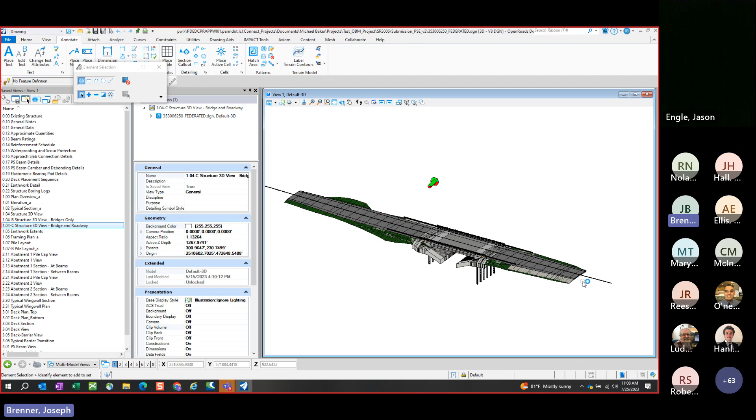So with that, we're going to jump right in. So here's the project. This is just an overview of the model and the roadway, that adjacent roadway. This is essentially the entire project encapsulated here, with adjacent roadway and the bridge model. You can see we have an integral abutment replacement.

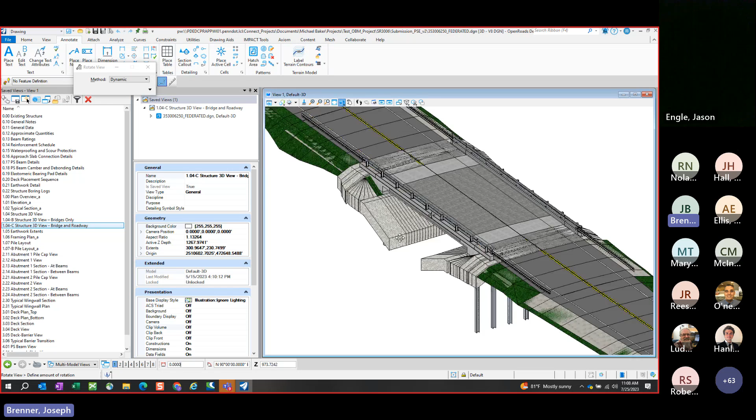You can see some of the riprap shown here, and some of the grading included, as well as the adjacent roadway grading as we come back here. So this gives you an idea, gives you oriented a little bit about what this project is.

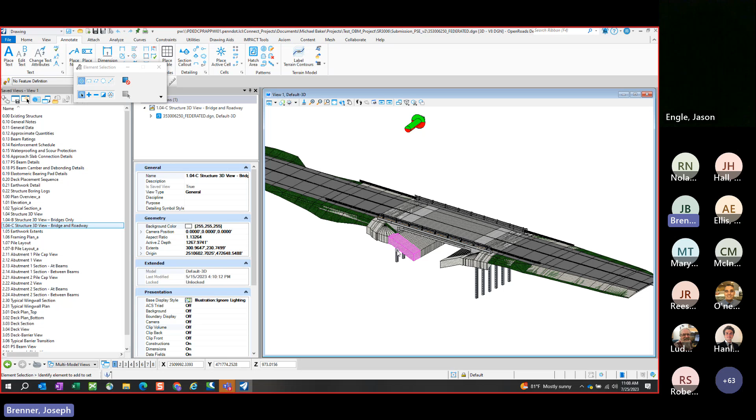The first thing I want to mention here is this is what we call a federated model, or a container file. So this is essentially all the different discipline files referenced into one file that can be viewed together. If I open up here, just where we're at in the project, you can see all these different files.

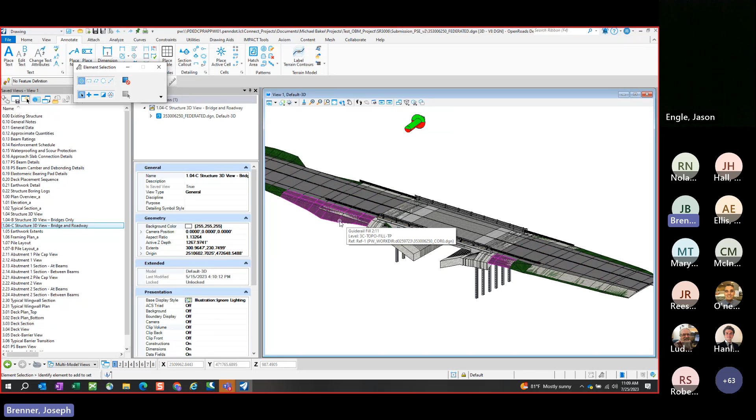These are the different files. We have different bridge element files here for beams, decks, barriers, abutments. So all those are individual files that were developed in OpenBridge Modeler software, and then we are referencing them into this container file along with the roadway and associated information. I'll show you why we do that, and go through a couple different reasons.

The first reason we do that is you can see here that we have what Bentley calls saved views, listed on the side. This is just one of the options that have always been within MicroStation. But what we can do here, with all the reference together, is set up specific levels, display styles, certain information that we want to see in particular views.

We can set up a particular view that can be easily navigated to by the users. In this case we're looking at the 1.04-C structure 3D view, bridge and roadway. If we want to look at the bridges only, not included with the roadway information, we can go ahead and navigate just to the bridges-only information here.

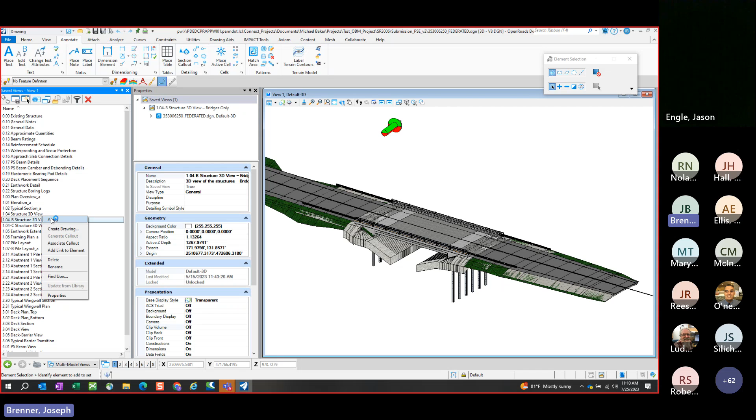ProjectWise is acting real slow on me today. But now here we're looking again at the same bridge, just with the roadway information turned off. Essentially the reference is turned off, and here you can see we have a different display style, more of a transparent view—you can kind of see through the beams there and everything.

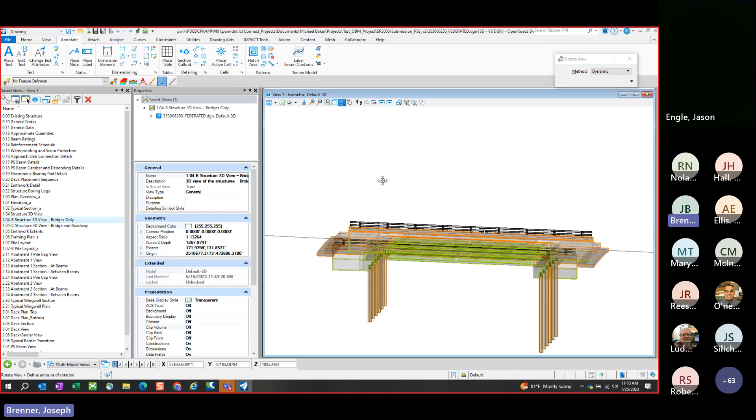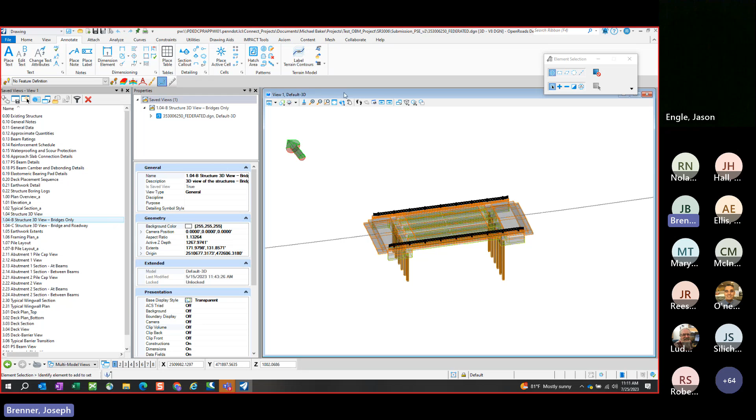So there's a couple reasons why we really like this attribute, especially for bridge kind of projects. With this, we can set up not only an overview—obviously we have 3D views here and can always spin and use this information—but we can also set up particular views for elements.

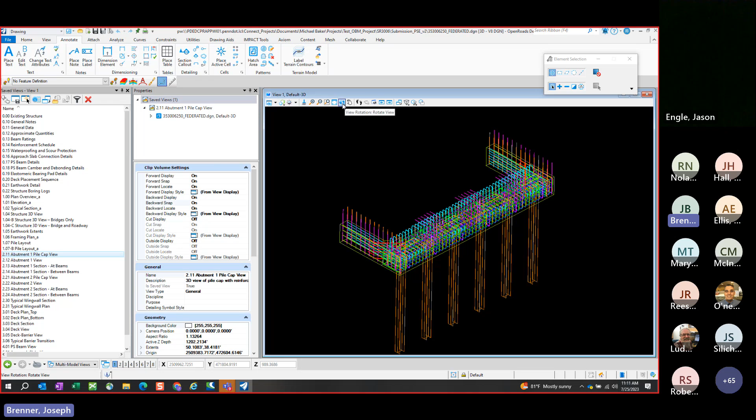I think this is extremely helpful, especially for those just getting into this workflow, to have some of that in a place where you can find information, with a title and description. If I bring this out here, we have a description of those views so that people can get oriented and have those views to look back to find the information they need.

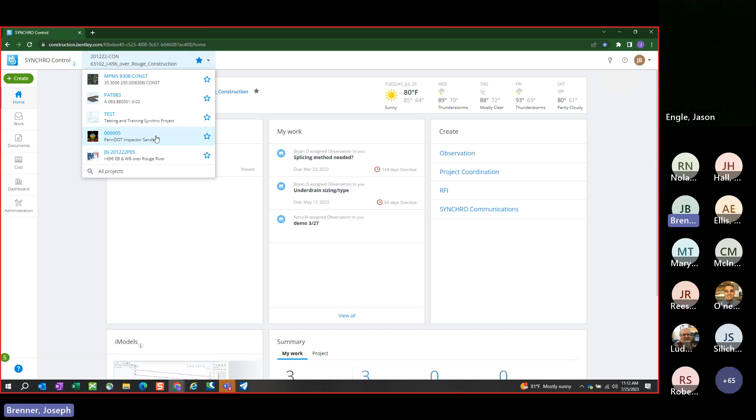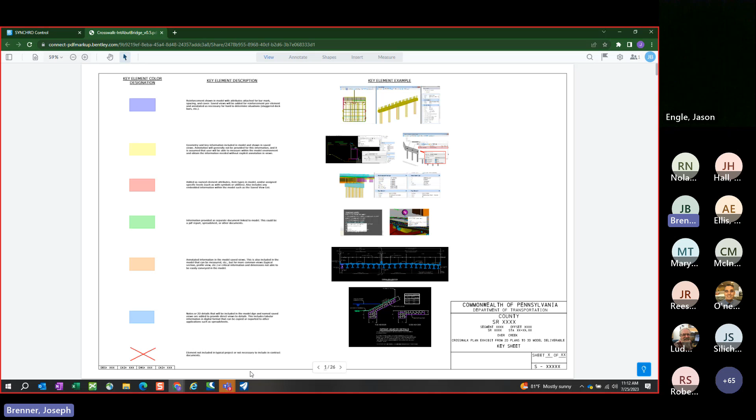This is going through a similar set of plans. I think we went over this with this group before, but it literally goes through a plan set, color codes it, and tells you where you can find that information in a digital deliverable.

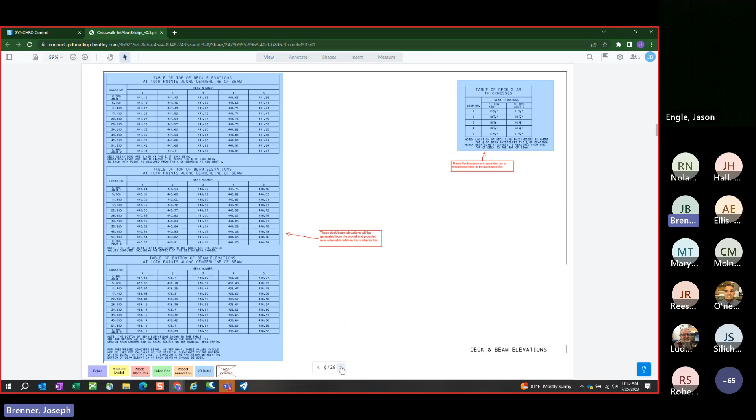We can go through—obviously we have several views here—and what we're trying to get at is we're not just handing a 3D model to a contractor and saying figure it out, go through the level list, figure out everything. We're giving them a starting point, and the idea is they use these saved views to get to the information they need as a starting point and add and measure whatever they need from there. We also have particular views that we have annotated.

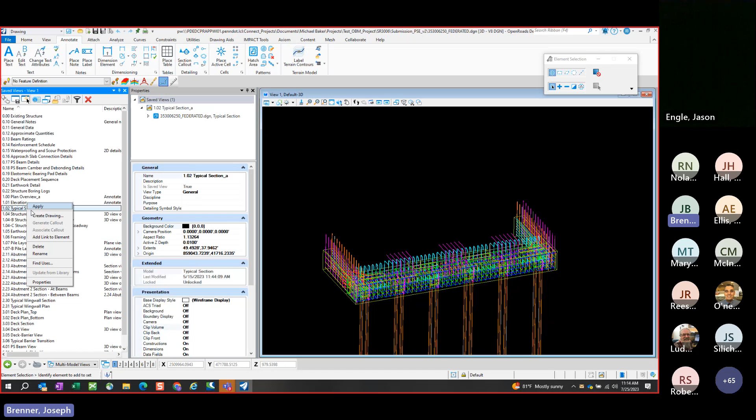Okay, so these are generated from the model here, but we have gone through and put on some typical annotations. So there's certain views that, and I'm a bridge engineer, that just going through it is kind of staple. You want to be able to find that information quickly. You don't want to have to measure a model every time to find that information.

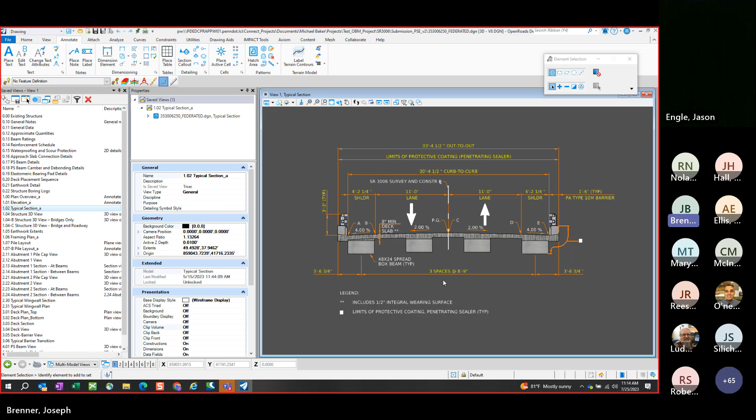One of those is the typical section. We have this information - beam spacing, everything looking exactly like you would typically see on a typical section view in a traditional plan set. But you have to remember, this is generated from the model, so this is basically a snapshot of where we are in the model, a section through our model. For example, this is through the end block of our beams, so you're not seeing the void in the pre-stress box beams of this set. If we were going to do this again, probably we would have taken the section at a slightly different place.

That's some of the things you have to remember here as you're going through it, and kind of looking at it, that you are in these particular views we are generating from the model, so they are snapshots of the model. That's a good example there.

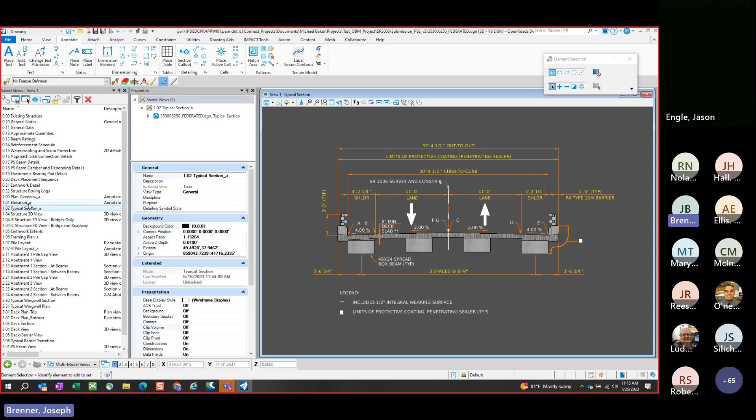So we have a few other ones such as elevations, plan overview, those types of views here that all have their typical annotations on there with those key information.

The other thing, there's just certain information that's easier conveyed with 2D details. For example, a big one is just general notes - that's just a 2D thing. It's just easier to have that information just in note form. We're not eliminating all of that here with a 3D model.

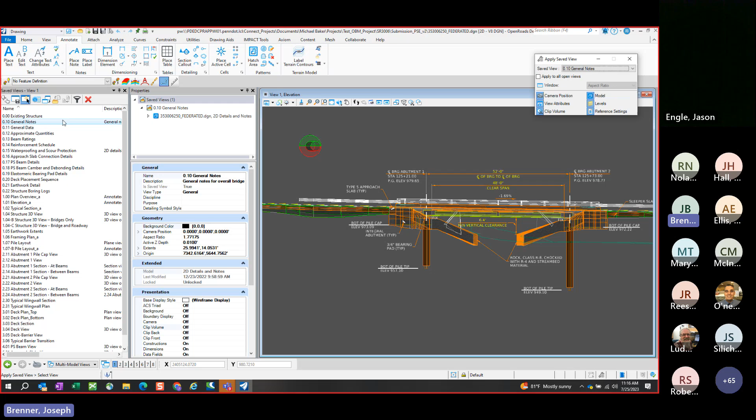So we have a particular save view here to our save notes, our general notes section. Now you'll notice here this looks very similar to our 2D details that would be in a PDF, but we have generated this now in the DGN file, and now these general notes and everything else can be referenced into the DGN file in a digital format, and all can be accessed through this federated model or container file.

So we can save views directly there. We can basically have a one-stop shop for all our information. That's another reason why we like this federated model and kind of pulling everything together here and going with these save views. So we have general notes.

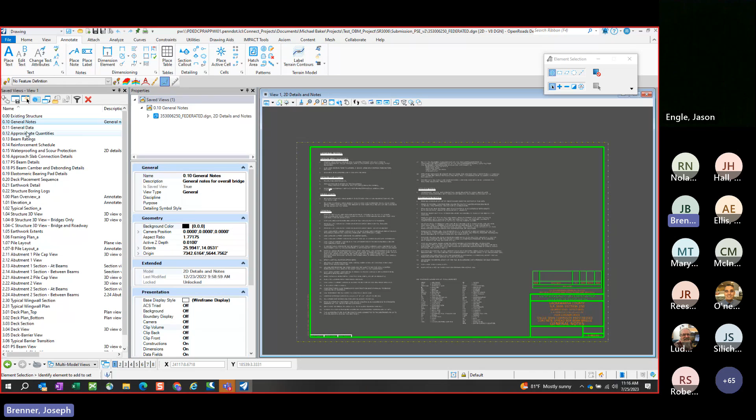Additionally, we have all of our typical information - we have approximate quantities here. As you can see, this is actually a linked Excel sheet that somebody can take this information directly from, but it's a linked spreadsheet that is also included in the deliverable files. So if anybody wants to just go and use the Excel and the information out of it for quantities, deck elevations, those types of things, they can take that file and have all the information here.

This is essentially a view or a replication of that data here within this information, so that we can kind of save to it and get to it easily.

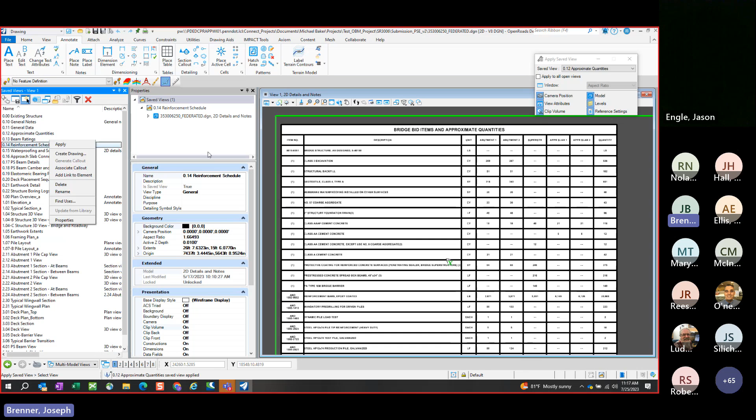So you can see there's the ratings, reinforcement schedule, those types of things are all tabular information that's available here in the same chart form, but also the information behind it, the Excel spreadsheet, is also available in the deliverable information for a digital file.

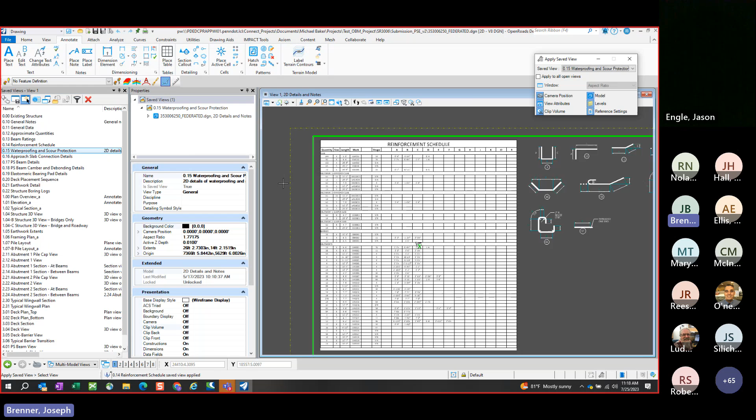Couple other things I'll go through here. As we mentioned, there is some 2D or some information that's just easier to convey in 2D details, or it's just more efficient to do so at this point. So a good example of that is some of the waterproofing details. Trying to do this in a 3D model and have somebody understand all of this information and be able to pull it out of a 3D model would be difficult.

For example, the preformed cellular polystyrene - they're going to pick that out of the model here, 2 inches thick, or even some of the membranes and waterproofing membranes and everything - that just is more easily, more efficiently and effectively conveyed with just a 2D standard detail. So we have these standard details for certain information that again is available.

We can still, because it's part of the DGN file, part of this digital file deliverable, have particular saved views so they can navigate to the information very quickly and have it in their hands available quickly. This differentiates between the generated views from the 3D model versus these 2D standard details put in for supplemental information.

So we have several of those here. You can kind of see those lined up here.

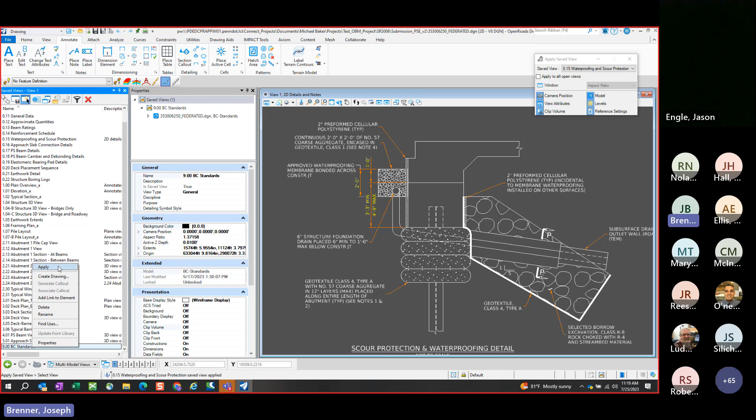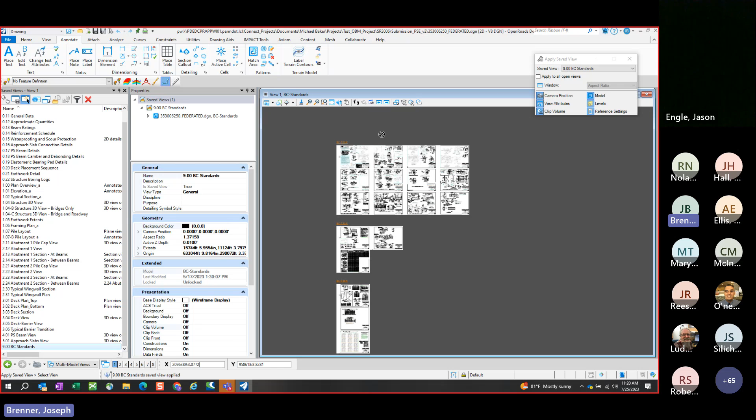Now that we have this information all digitally, we can also put in things like BC standards, just copy that information in here. In this case we use raster images of the BC standards. This came from feedback from the inspectors, who asked if we could pull in the BC standards so they don't have to have that as a separate thing now that we're all in the model format, since we'll be looking at this information. We said yes, we can definitely do that.

So this is just the applicable BC standards, raster images brought in here, and now we can pull that into a separate file and reference it, with saved views directly to that information so they can pick out what they need.

Okay, hopefully that gives you an overview of the information here.

What we're going to do now is leave our ORD and DGN files behind and go into the Synchro environment. This is another way to view the files in a different software called Bentley Synchro, which is cloud-based. We'll show some of the similarities and also some of the differences and limitations here for the different views.

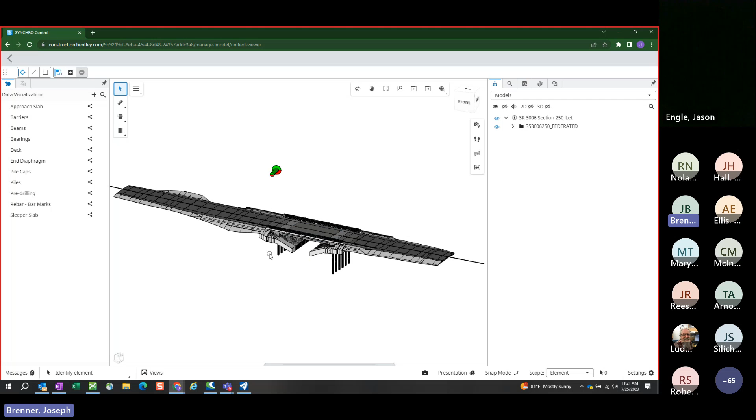So this is the information here within our Synchro model. Again you see very similar, this is a similar view to what we started out in, right? Overview, you can see the adjacent roadway information. We have our bridge here and some of the different surfaces around here.

So we have that ability to bring that information into Synchro. We also have the ability to do saved views, similar to what we did in the DGN files. It's one of the things we're working out with Bentley right now, making sure that information comes through 100%. We've had to recreate some of those saved views or update them—you can see that in some of the group titles here—but we were able to get that information into similar form, similar saved views to what we went through before.

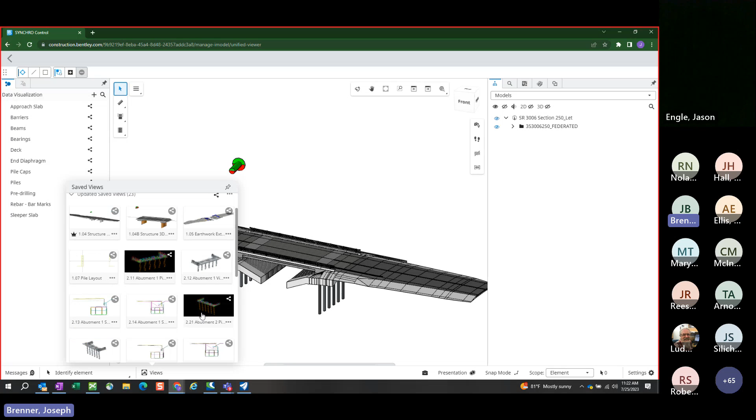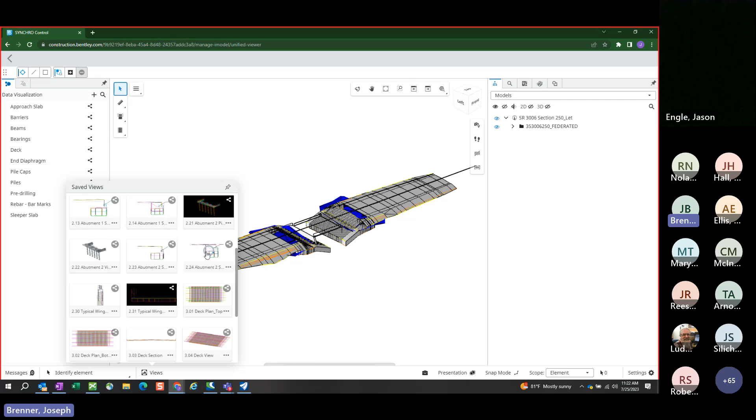So I'll go through a couple of those here. Again, here's just a structured 3D view, with some of the earthwork coming in. So again these were all coming through here. We could still do sections—some things to note: you can see that this isn't in some ways quite as clean as what you see in the DGN files.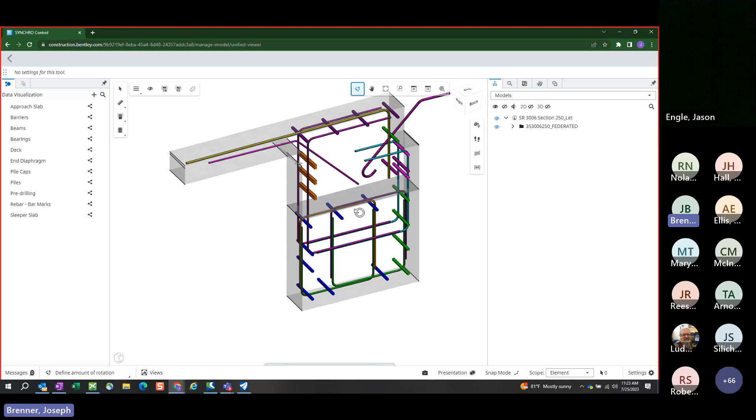And again, you just have to understand that these are snapshots in the model. If I rotate this, you can see that this has a section depth, that we're trying to show certain information, rebar here through the section. In this case it looks like it's through a beam without a pile, so typical if you're used to the integral abutment sections that we typically do here, you can see that information shown.

One other thing I wanted to point out, that I failed to do in the DGN file, is that all of the elements in these models are smart, if you will—they have logic and information behind them. So I pulled up here just on a certain rebar set.

All the rebar in this model have certain attributes attached to it, so that anytime you select a file or piece of information, we can view this as properties of that element. Here we have bar mark, so we can automatically find that information. We also have size, grade, and the bar spacing included here.

This is so that when the contractor or inspector clicks on a bar, they can quickly get the bar spacing. It'll automatically select that set, and we have the maximum bar spacing for that set, so they don't have to measure between each bar. That information includes the side, bottom, and top cover of those particular bars.

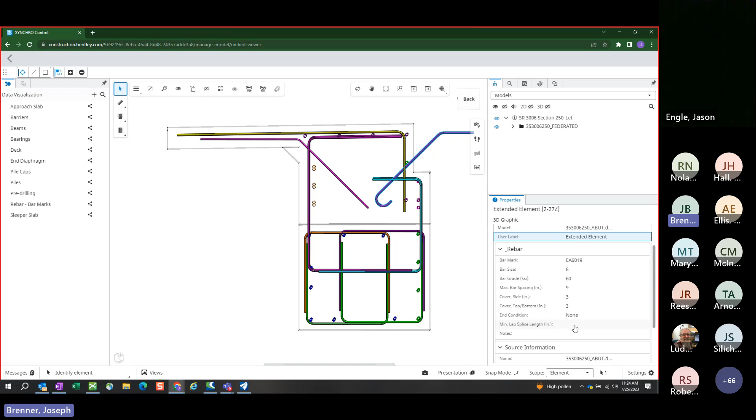There could be some end conditions like hooks or mechanical splices, those types of things. And if we do have bars that are spliced, we have a minimum lap splice length put in, and of course a notes section that we can use for any additional information for that particular set of bars.

We also have them for solid elements, other bridge elements here. In this particular case, this is our pile cap. We have our NBIS number, getting our asset information set up here, concrete class, fixity, location. Sometimes it's easy to get turned around, so you have to click on that and make sure you've got the correct element.

We also have some information here that we can put in as details. This is just listing, at the bottom of the pile cap, a certain elevation. That was something that came out of the review, that the reviewers wanted to see as part of that information, and not have to calculate or dimension that themselves.

Finishing this off, we have anything that could be some BC standards applicable to the element. Not only do we have them referenced, but you can click on that element and find the information you need for the BC standards.

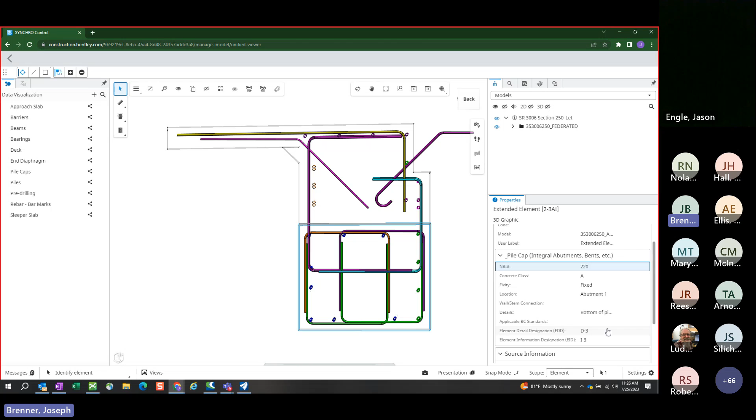The last set of information for each of the solid elements is the level of development key that PennDOT is using, one of their standards being element detail designation and element information designation. We won't get into that too much here, but for each element, in this case the submission for letting, we have that as an attribute somebody can quickly gain and glean from the models for the specific properties.

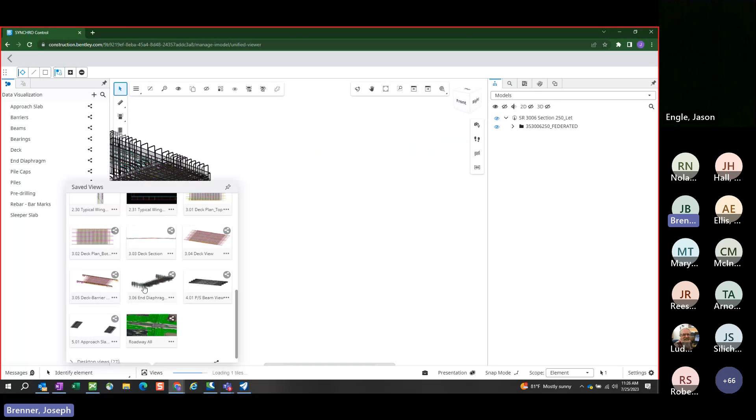So just working through those saved views and diaphragm details, again you see reinforcement. Sometimes it's amazing that we can get concrete in some of these things, how much reinforcement we put in here, but we're able to find that and have that information in a specific setup.

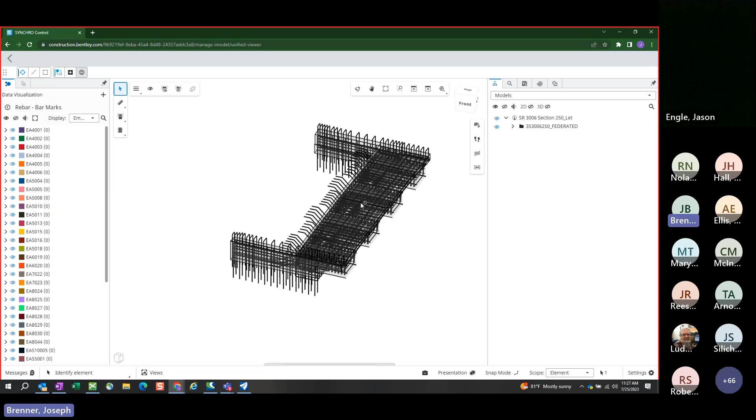The other thing we can do, particular to the Synchro control, is what they call data visualization. In this case, we have some of the different elements set up here that we can reference and filter out to find particular rebar sets.

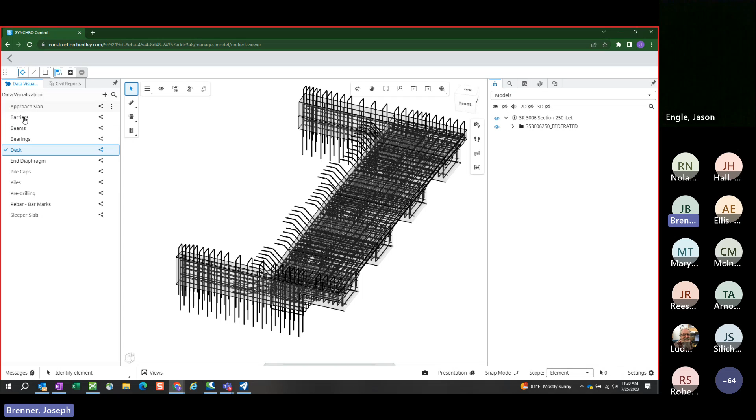Let's see if we can pull this in and show you what that looks like. Let me go to a different one—that one looks like it's off for a second. Looks like what happened before with it breaking seems to happen again here. So we'll go through and actually create the data visualization so you get to see that too.

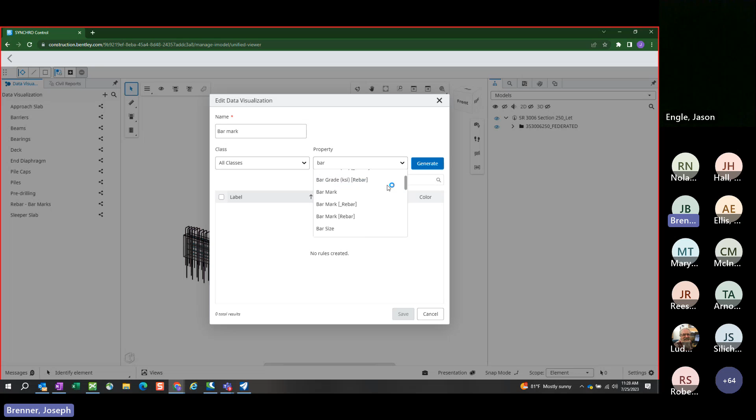So let's do a diaphragm here. We're going to create a new bar mark designation for all of our bars. Let's look here—looks like we have bar mark and rebar. We can generate that, and save that. Now it looks like we're in business here.

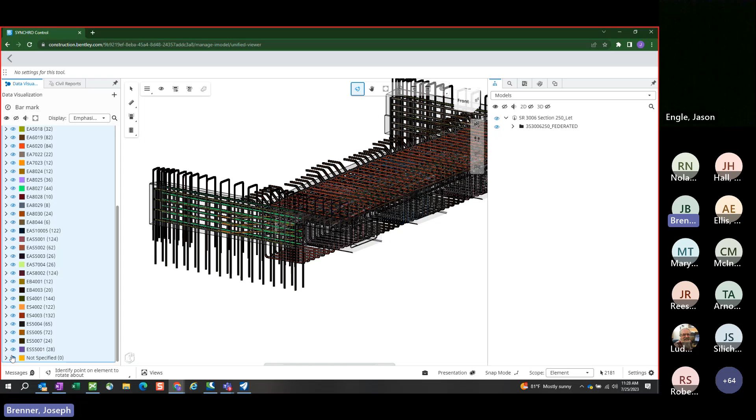So if I zoom in, you can see it gives the rebar a bit more of an attribute here, different colors, and now we can isolate certain bar marks. So if I say I want to really look at that—

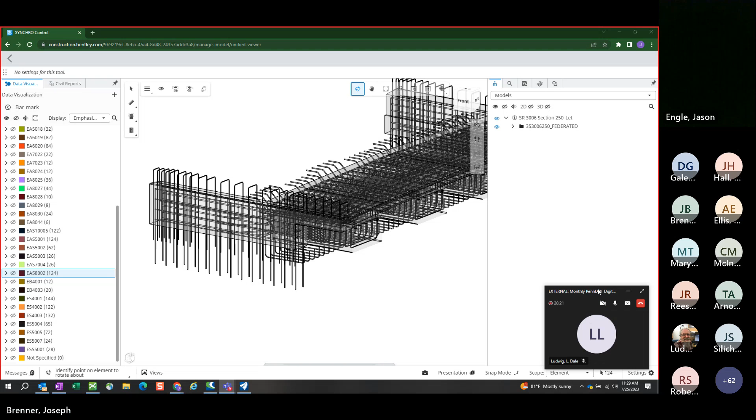You guys hear me now? I hear you well now. Thank you, Dale. I've been having trouble with this headset, so I appreciate that. We should be good now, but let me know if it happens again.

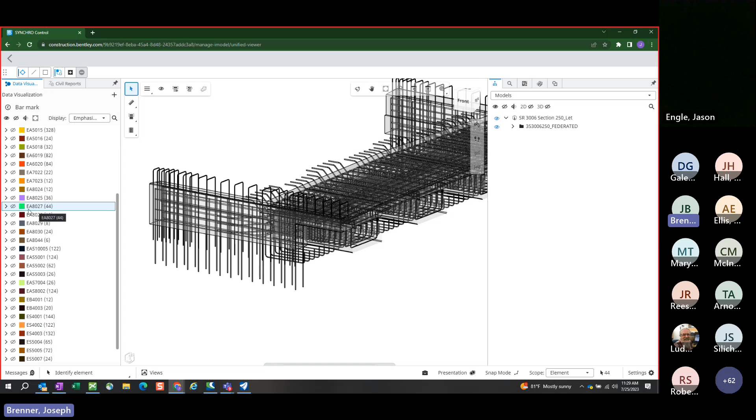So again, now we have our data visualization. All of our bar marks, all of our rebar, are essentially set up here. If we want to see our EA 8027 bars, we can either select them and have them highlighted so we can quickly find that within our model, which is called emphasize. We could also isolate them, where everything else turns off and we just see those bars.

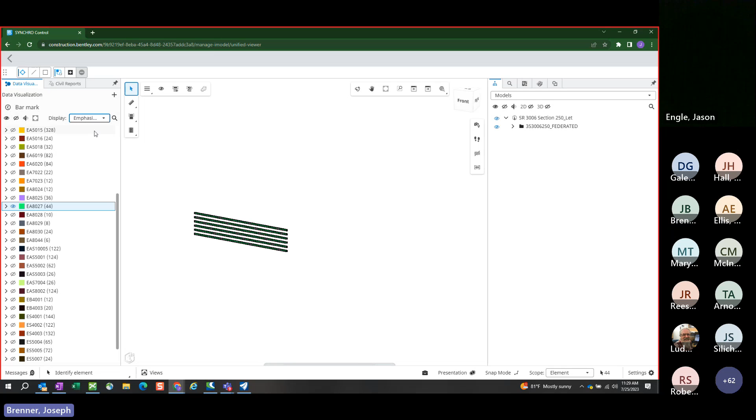So just some different features here with this cloud-based software that we've been working with, seeing how we can best convey this information in these particular views in these software tools.

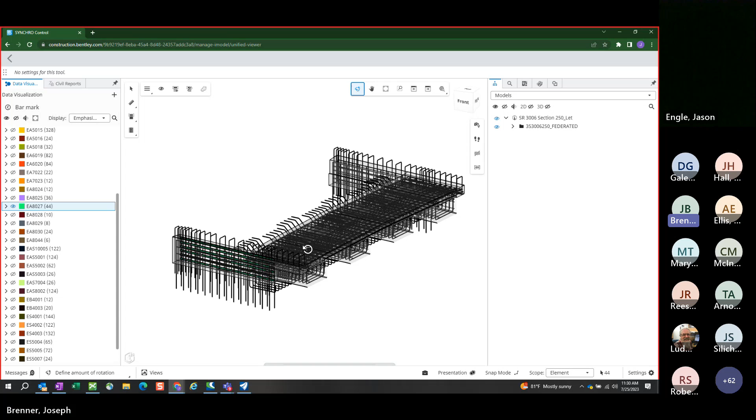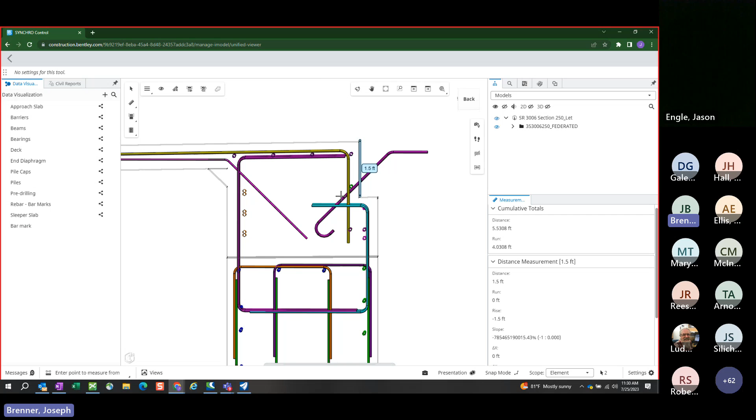Let me go back here to our section view. And this is all again completely to scale, so anything can be dimensioned through this. You can find particular start and end coordinates, so XYZ information for everything we have here. Beam notch dimensions, everything again is to scale, and information can be pulled through that.

We could take specific sections through here and again get different properties. So that's really what I wanted to go through here today, just to give an overview of what that looks like in an actual project.

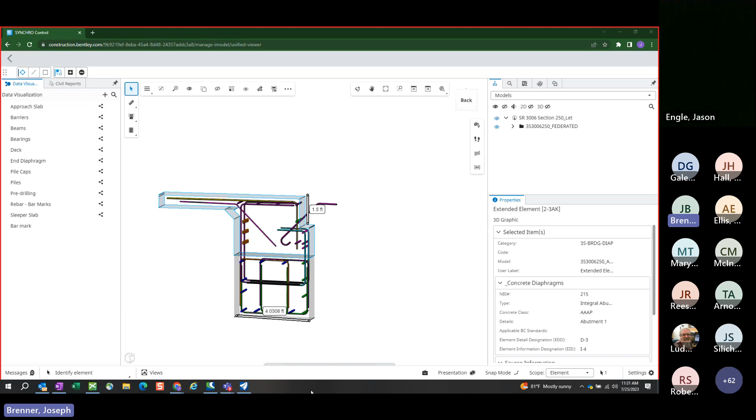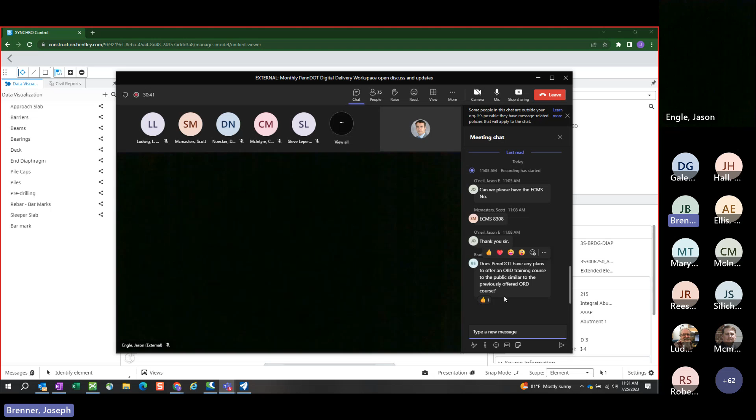Scott, I know you're still on the road here, do we have time for questions? Yeah, you still have about a half hour, Joe. Okay, so this is all me, huh? Okay. I'll stop here for now before we maybe take a look at some other things. But does anybody have any questions? Looks like we got one in the chat here.

Does PennDOT have any plans to offer an OBD training course to the public, similar to the previously offered ORD course? Scott, I can start with what I know, and then if you have anything else to add. I do know that is in the works, Brad. There's been a course developed, and it's been going through internally at PennDOT with the pilot projects. So I do know that is in the plans to offer that to consultants as well.

Any other questions from the group? Looks like, is it Jason has his hand up? Go ahead and unmute yourself if you can and go ahead and ask.

I just, I guess my question would be, and I've asked this in the past, but it seems like you were kind of integral in developing this particular project. As far as development of this model, how does that differ as far as effort and time compared to a traditional project delivery, plans delivery and whatnot? Just so as we start to migrate into this, we can start to prepare as far as design schedules goes. Obviously there's a learning curve and it will increase over time, but just to start out, what kind of effort and time are we looking at to deliver compared to a traditional process?

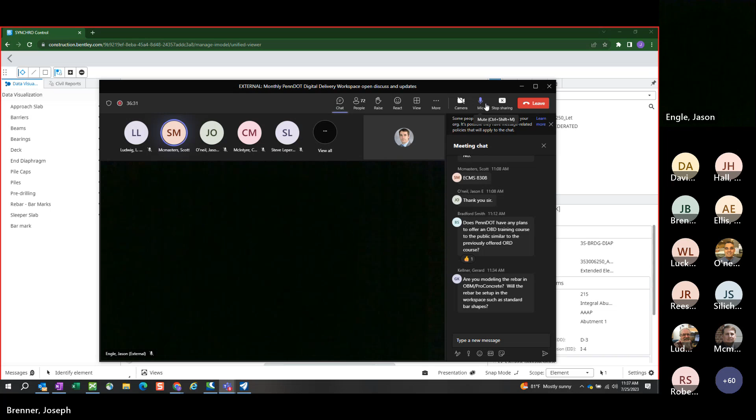For the District 1 project, that's something to think about - there's going to be new things, surface templates, linear templates. There'll be some stuff that the roadway side's going to have to learn as part of moving this forward. No, good point, Scott. Thank you.

Another question that came in here I see is, are we modeling the rebar in OBM and Pro Concrete, and will the rebar be set up in the workspace such as standard bar shapes? So another really good question here. The first answer is yes, we are modeling them using the Pro Concrete tools.

In this particular case, we were using all the tools now available through OpenBridge Modeler. Bentley's kind of migrated the Pro Structures or Pro Concrete tools into OBM in certain cases, and there is now a way to activate the full tool set - if you have a Pro Structures license, you can activate the full tool sets from Pro Structures to do your scheduling and everything there. So yes, that's how this particular project and the other pilots are handled.

We do have the standard shapes in the ProStructures library that is currently part of at least the test and the workspace that the pilot projects are using now. That has worked well for most of the shapes. We found some of the more complex shapes to be an issue.

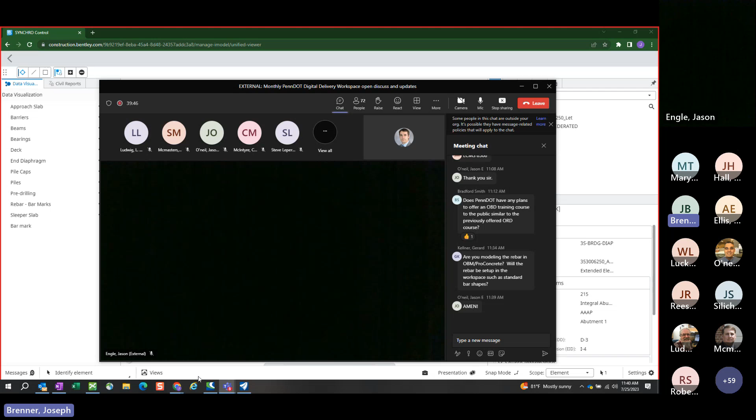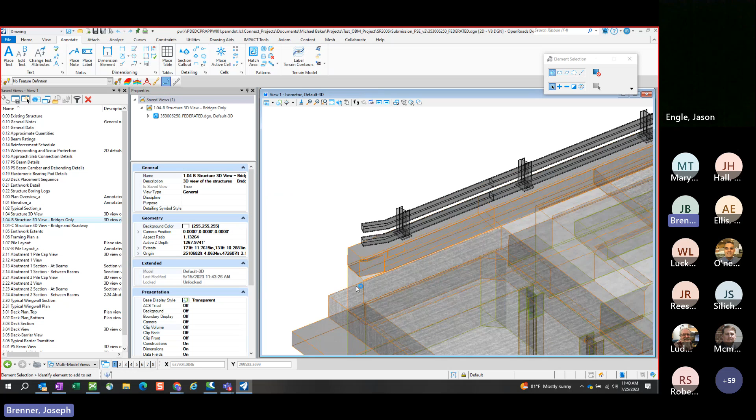Not only the solids part of the transitions, the barrier transitions here, let me get back to a better view of that, so those who aren't as familiar can get a better feel for what we're talking about. So some of these, where the guide rail comes in, all those shapes and stuff - this is a standard setup that can be brought in as part of the workspace.

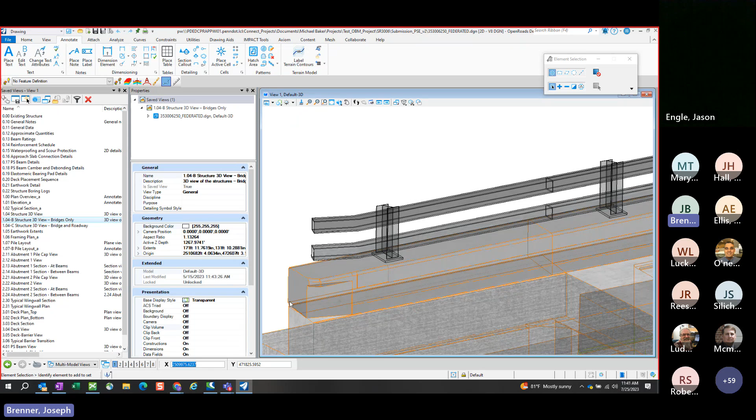So with that, not only the solids as I mentioned, some of those barrier transitions and everything here, we're looking at including that in the shape as well, since it is so standard. And also some of those bar shapes are difficult - the program sometimes has difficulty scheduling those and finding the correct bar shape, even if it's in the bar library. So we've been working with Bentley hand in hand to make sure the program is updated, and that we're doing everything we can to utilize the program in the best way possible.

Any other questions? Looks like we got another one coming in here.

So will the model files for the pilot projects be made available so we can see how everything was put together?

It's probably an answer or a question more for Scott here. Sorry, I keep passing them off to you here, but eventually, yes - we have to wait till they have been advertised and released before we can share them.

So this one's out there, it's advertised, it's available. If you have access to ECMS, one thing to keep in mind with these projects as they go out, they are being put out and requiring pre-bid meetings for anybody that decides to bid on these too. So that's another step we're taking as part of this - we're not just throwing it to the contractor, we're sitting down with them and saying, here's what's in this, here's what we're expecting from this project too. So we're also doing that as part of the bids.

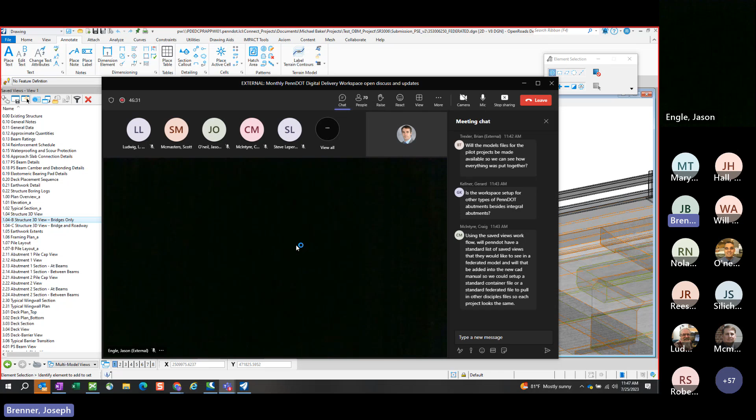I don't want to get too far ahead of ourselves, but I see some of the next steps as setting up particular display styles. For example, a general 3D bridge view would have a specific display style that comes out with only certain levels turned on as its starting point, without any of the roadway or other information turned on. So there's a lot more we can do to standardize that.

Standardized, if you will, to make sure that the project — and I've heard Scott say this many times — one of the things PennDOT's really trying to do is make it so a project in District 1 looks like a project in District 6, with that standardization across the state. That's just some additional things I see coming as PennDOT continues to develop this process.

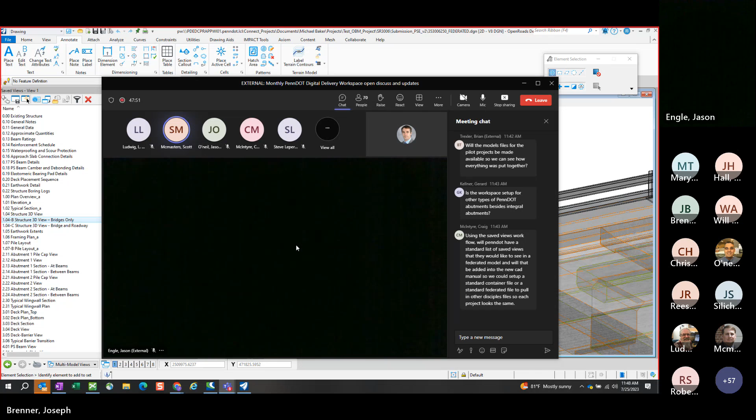Display styles are something we haven't done a whole lot of internally with PennDOT in the past, but we're seeing advantages, especially with the review process. We can highlight things, change symbology through that display setting. It gives us more control than overrides for levels — this is a better option because you can do more visualization options than just one option with a level. Display styles is something you'll definitely start to see more of within the PennDOT workspace going forward.

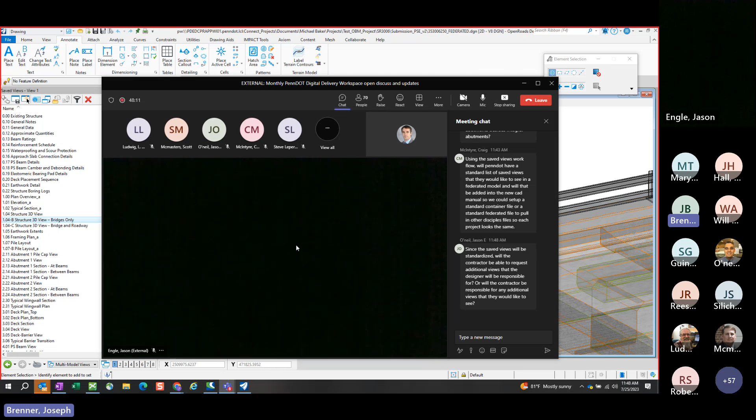It looks like another question came in from Jason: since the saved views will be standardized, will the contractor be able to request additional views that the designer will be responsible for? Will the contractor be responsible for any additional views they'd like to see?

Scott, you can provide input here too. I see that as being very similar to our process now. The idea with these saved views is they're a starting point for the contractor and other stakeholders to use and take — they can create their own saved views.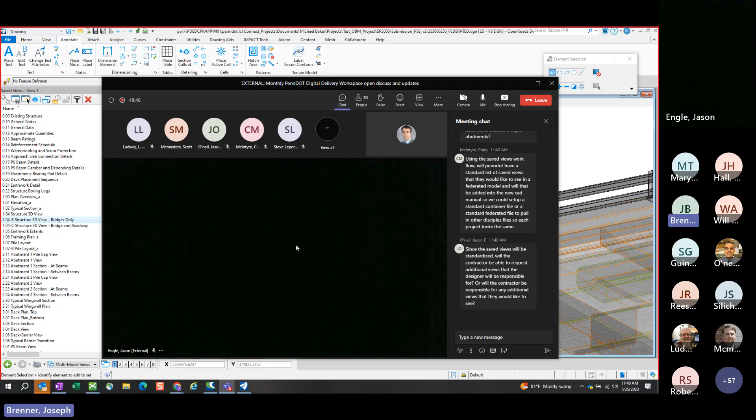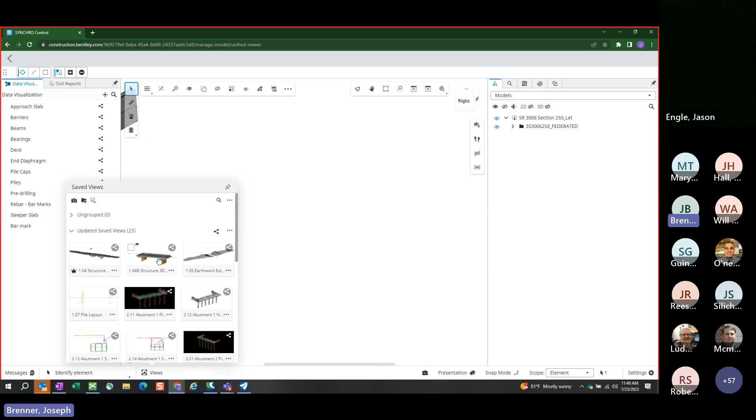With any information, they can't really add content in Synchro like this. They can't come in and say they want the bridge abutment a foot wider — they can't make those kinds of changes, but they can turn off levels, manipulate the views, and create their own saved views. Sorry, I'm not in Synchro here, but same difference — they can do that within this software and create their own saved view.

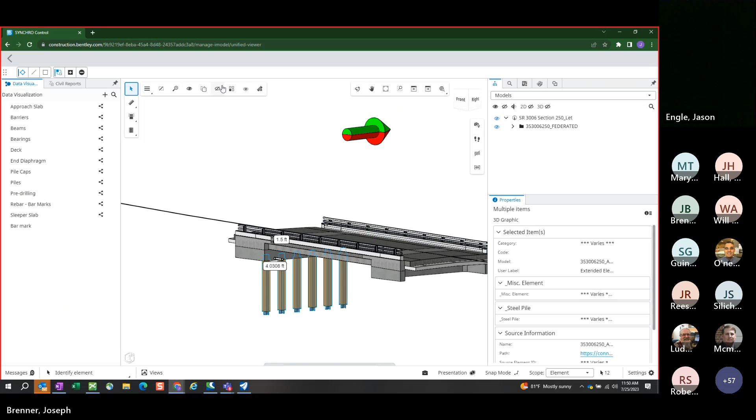Maybe they want it over here and want to turn off the piles for whatever reason. Okay, and this is what they want their save view to look like. They can go through and take that save view — so now they have another view here.

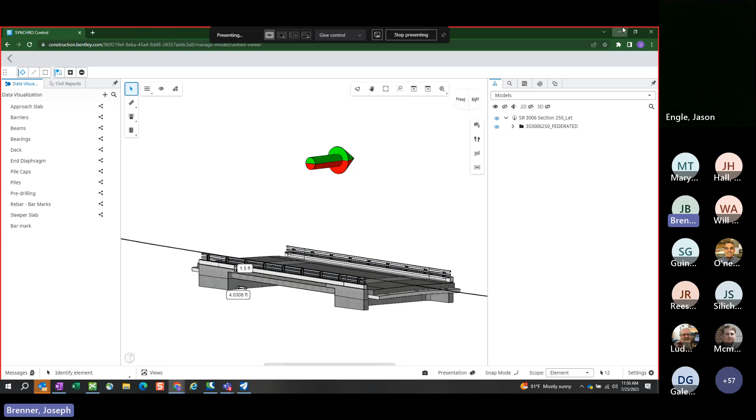I think there's probably more information there since they have the digital files — they have more ability. So that would be the first go-around, and they can get the information. But in terms of requesting additional views, I would think it would be more like requesting additional information, similar to the process we have now.

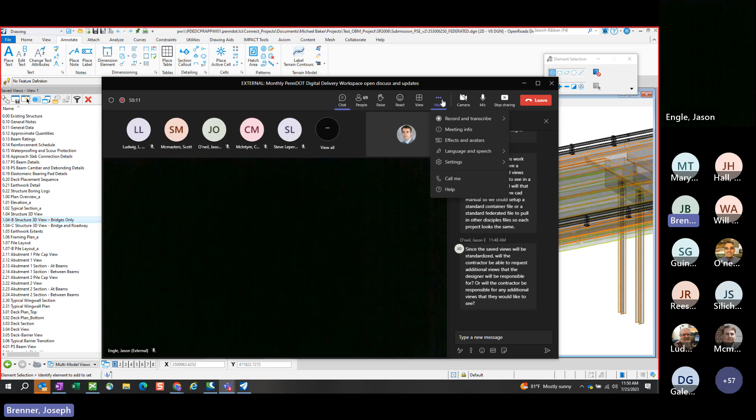Good question though, Jason. I thought I saw somebody have their hand raised — did somebody have their hand raised and want to ask a question? Looks like they are... doesn't look like we have any now.

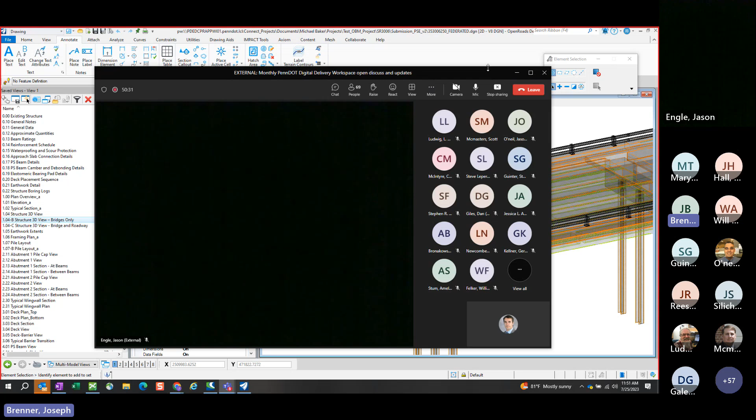Anybody else have any questions? Again, I wanted to make sure I left time for that. I figured there would be more questions here. Yeah.

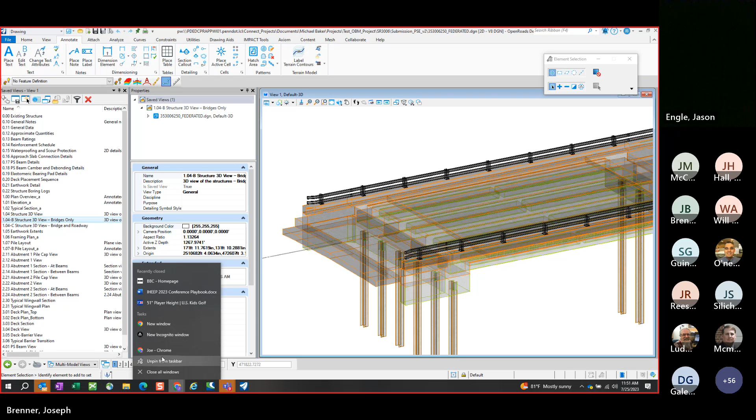Joe, I guess something else we could point out is, for where we are today, out on the CAD training resources page, a lot of this is documented as far as some of the training materials. It may not be up to date with what Joe has learned in the last few months, but there's that initial training we did internally for some groups, available under training resources today. So there's information people can look at if they want to start seeing where we're going with this stuff.

You might have to guide me here a little bit, it's been a while since I've been here, but it's CAD resource files, and then training. Yep, okay. So we have the ORD training, and we have the initial release of what we call the model-centric workflow user guide. Let me back up here one. I'll go ahead and paste this in the chat window if Scott's okay with that. You all right if I paste the link there? Okay.

So this is a PDF, and it has a lot of workflow information specifically on the modeling aspects, how we create these bridge models. I would definitely encourage you to check this out.

As Scott mentioned, thank you for reminding me of that, there's a lot of really good workflow information. This is not just a copy or summary of the Bentley training, it goes into much more detail, into how we get to a PennDOT detail from the Bentley OBM template that doesn't fit what we need here. We go through a lot of different situations of how you can use some of the tools available to get further level of development for your models than just the Bentley templates out of the box. It also works with our workspace out there with all the templates we have, and goes through how we develop these and use those together to get our PennDOT bridge models to where we need them to be.